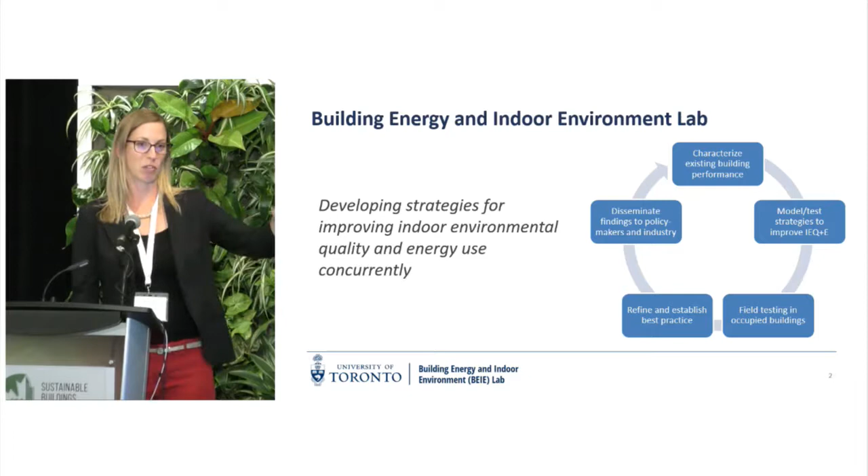And then sort of the latter part of our cycle is disseminating best practices. The lab's only been around for a couple of years, so we're still working on some of our initial projects, but that's sort of the end goal, to then influence design. So really the areas in which we work are the intersection between HVAC systems and the building envelope, and then of course how the occupants of the building influence both of those components.

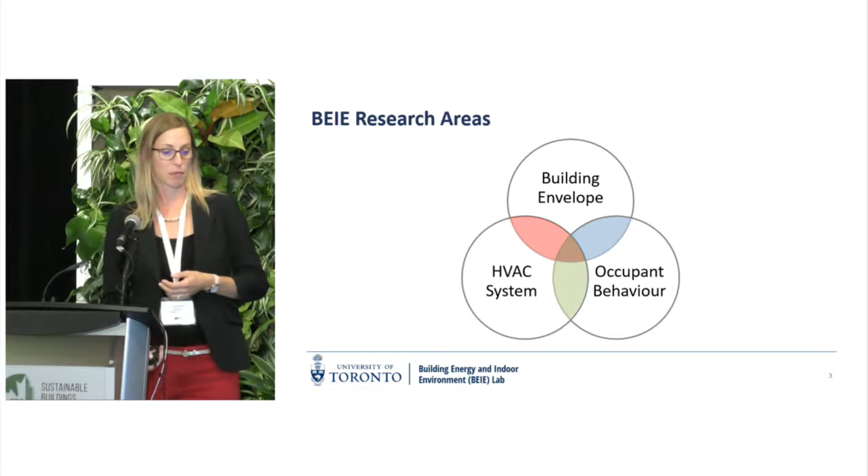So today, with this focus on overcladding in post-war apartment buildings, we're first going to have a bit of a crash course on how post-war apartment buildings operate. We'll look at what happens when you tighten the envelope, how that influences building performance, and then what happens when you build tight and then add that appropriate ventilation, so ventilating correctly.

And then I'm going to tell you a little bit about what I think is a pretty exciting study that we're working on at U of T. I'll show you some of our pre-retrofit results, but I'll have to come back next year maybe and show you some of our post-retrofit results. And then I'll talk about what our next steps are as well for this study.

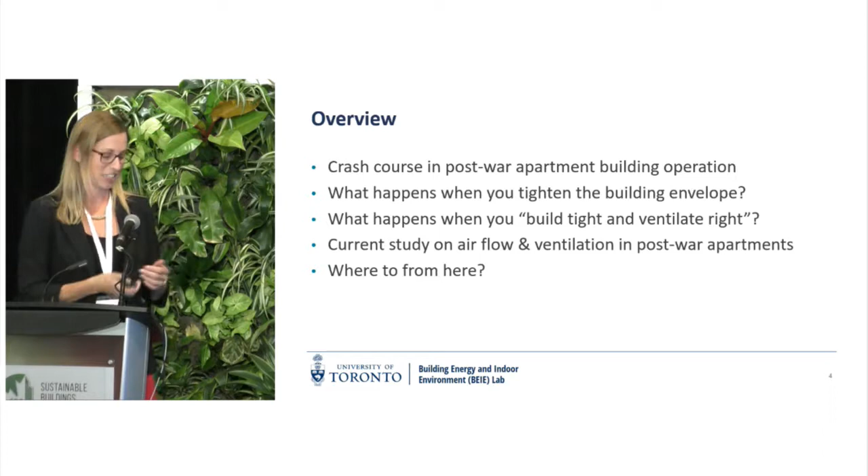So anybody who knows me knows I love these buildings. This is actually the building where I did my PhD. I spent a lot of time in post-war apartment buildings across the city. Just to get a sense, how many people in the room work in this sector and have a lot of experience poking around? Oh, only a handful. Okay, I expected a lot more. Okay, great. So maybe the crash course will be useful for more people than I anticipated.

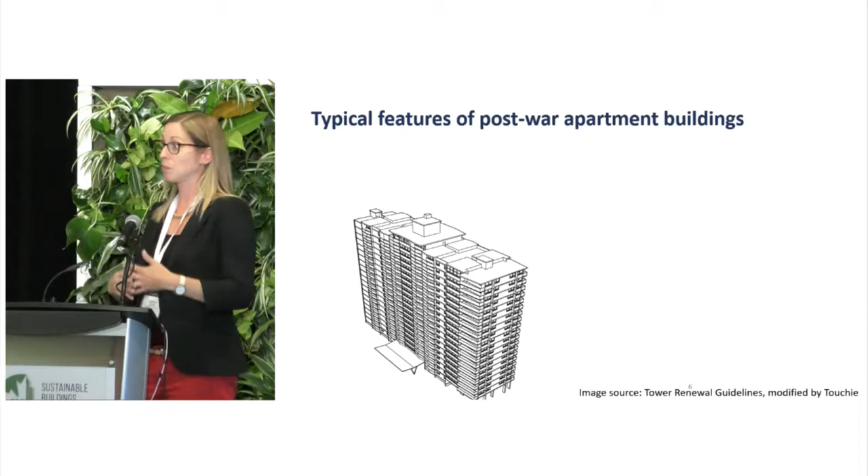So now I have to preface this. Obviously, every building is different, and we need to take a unique approach to really understand the challenges of each individual building and the occupants in which they live. But generally speaking, this typology has a lot of common challenges associated with it.

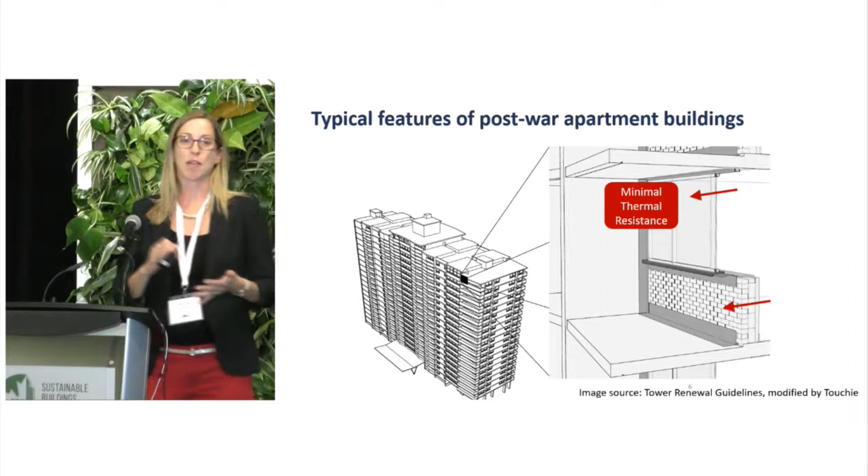First of all, these buildings were built in the 1960s and 70s, at a time when we weren't really spending a lot of time focusing on energy performance, so minimal levels of thermal insulation, if any. The original windows were usually typical single glazed sliders, very air leaky.

They are also different from the commercial buildings where I'm sure a lot of people in this room spend a lot of their time. We also have operable windows, so that adds a level of complexity here. We have exposed slab edges, which are very typical, so a lot of thermal bridging happening.

Also, one aspect of their operation that I don't think a lot of people are aware of is these buildings typically don't have any in-suite heating control. So there are often one or two temperature sensors used to control the entire building. So how do occupants regulate their temperature? They open and close their windows. That's also how they get access to fresh air.

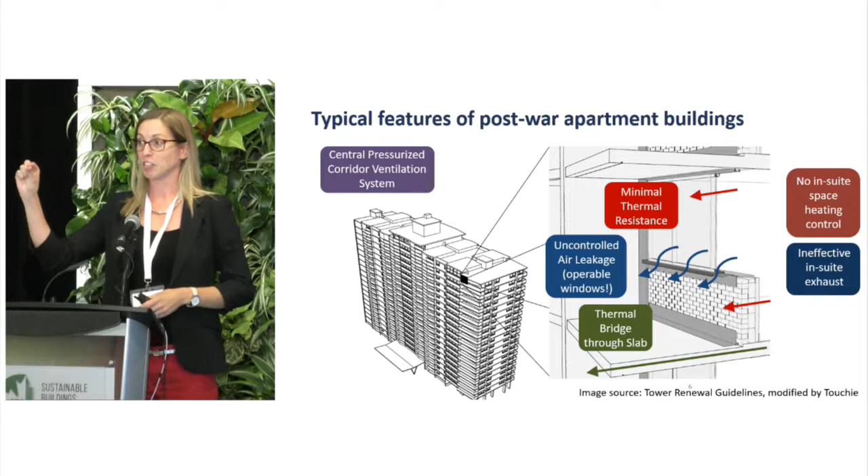So we really can't ignore occupants in a building like this, because they actually have an enormous influence on how the building itself operates. In terms of ventilation systems, these buildings typically operate with what's called a central pressurized corridor ventilation system. That involves a couple of makeup air units up on the roof that bring fresh air into the common corridor spaces, which in a perfect world are positively pressurized. Then we're relying on little tiny undercuts underneath the suite doors, if they haven't been blocked up, to allow that ventilation air to transfer into the suite.

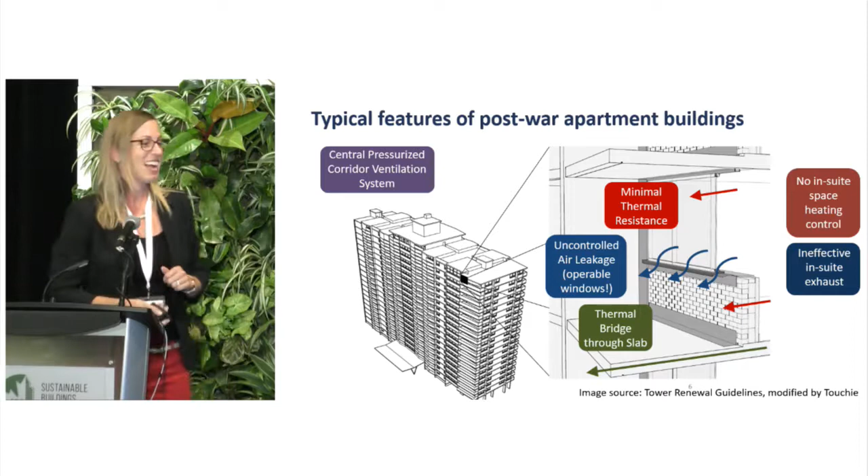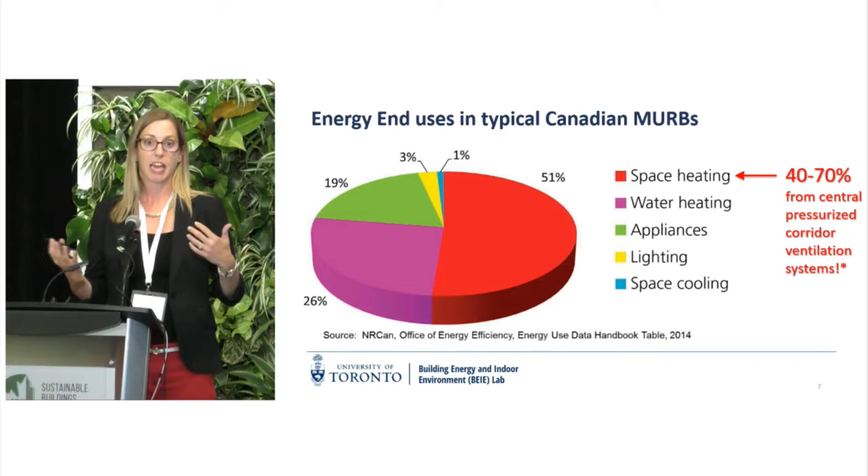So a lot of things have to go right to make these systems work well. But these buildings, in terms of energy performance, see a pretty similar profile to a lot of residential buildings in Canada - roughly half on space heating, a quarter on domestic hot water, and the remainder on all our other electrical loads. But a number of studies have shown that the operation of these central pressurized corridor systems, or the lack of their effective operation, actually contribute enormously to that space heating piece of the pie - between 40 and 70% roughly associated with their operation.

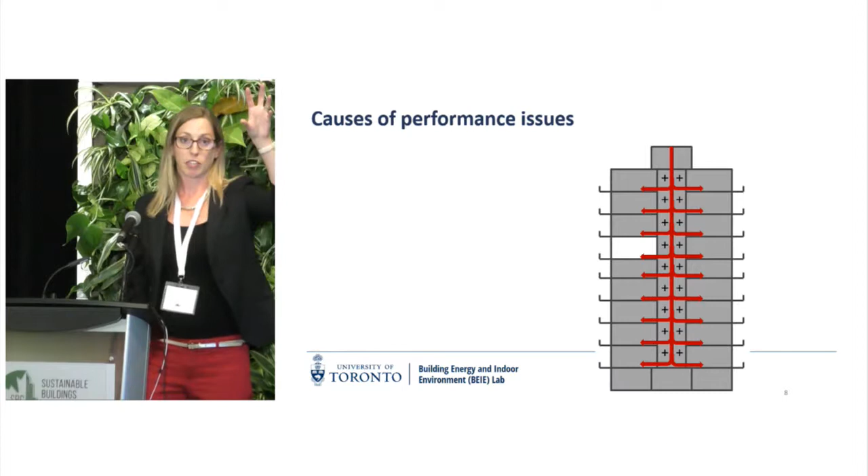So let's look a little bit more closely at how they work. As I mentioned, we have these makeup air units on the roof that in a perfect world are positively pressurizing, evenly pressurizing all the way down the building. But in reality, these buildings, or any building really, particularly in our climate, are operating under a lot of different dynamic conditions. We've got the effects of stack due to the difference between indoor and outdoor temperature, and we've got wind impacts as well.

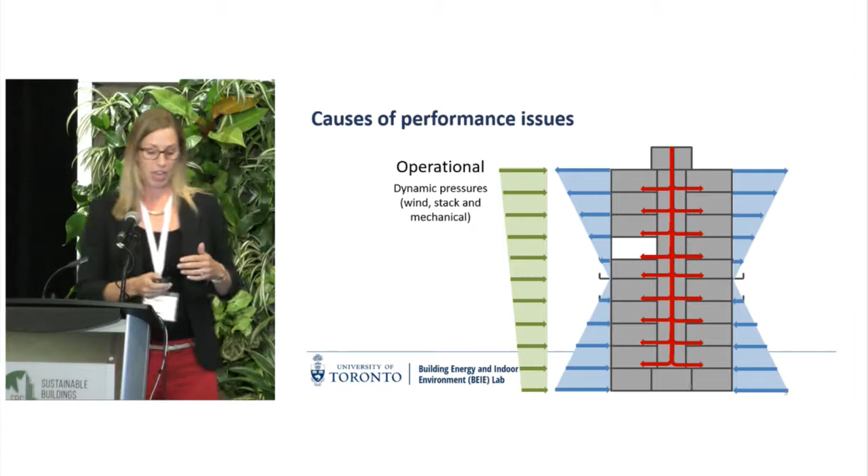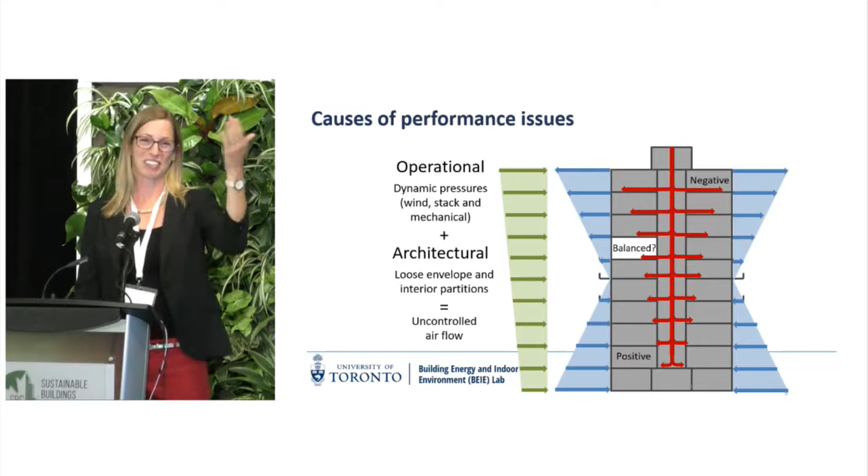And when you pair that with a relatively loose envelope - remember these people are opening and closing their windows to regulate temperature - and a lot of continuity or connections between the interior zones, so we've got a lot of interzonal air leakage, you end up having, it's really a bit random who is actually getting the amount of ventilation air that they require. So typically near the top of the building, we'll see higher ventilation rates than near the bottom.

So we know, and we've known for years, that these systems don't work, but to deal with a lot of these dynamic issues, these systems tend to be quite oversized. A study of about 10 MURBs - multi-unit residential buildings - built in the 1990s showed an average of 2.5 times the ventilation air being delivered from the makeup air unit than what was required by ASHRAE 62. So these buildings, these systems, are oversized.

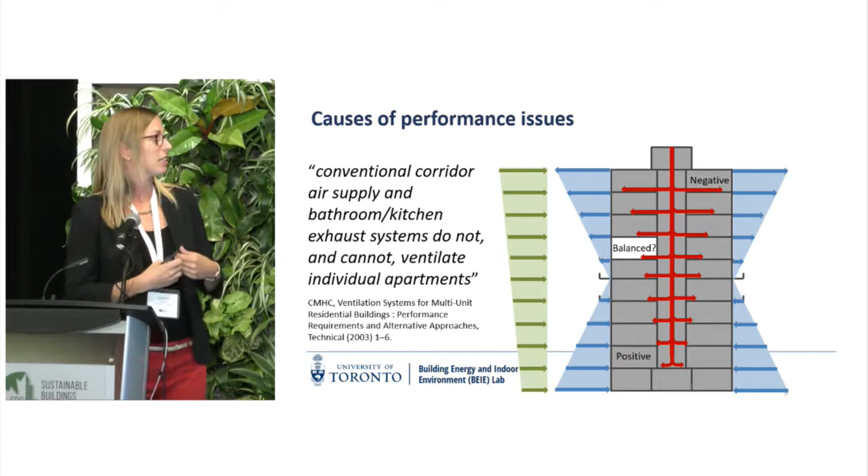So now that we have a sense of how these buildings operate and some of the challenges associated with operating them as they are currently designed, I want to take a look at a couple of case studies that have been done in other parts of the world - one Canadian and a couple in other parts of the world - and then I'll talk about the study that we're working on.

The first one, I'm sure many people in this room are familiar with, is the Belmont, probably the most monitored and tested building in Canada. It's a condominium, moderately sized, 13-story, 37 suites out in Vancouver that underwent an overcladding process, and RDH Building Consultants has done some extensive monitoring and testing of this building. That's why I'm using it for this example. We don't often have access to these type of data on this particular building type, but they used tracer gas

testing to look at how the air moves throughout the building, and extensive air leakage testing as well. So one would hypothesize that when you tighten up the building envelope, so you control a lot of that previously uncontrolled air leakage across the envelope, you would think that would have a significant impact on how air moves through the building.

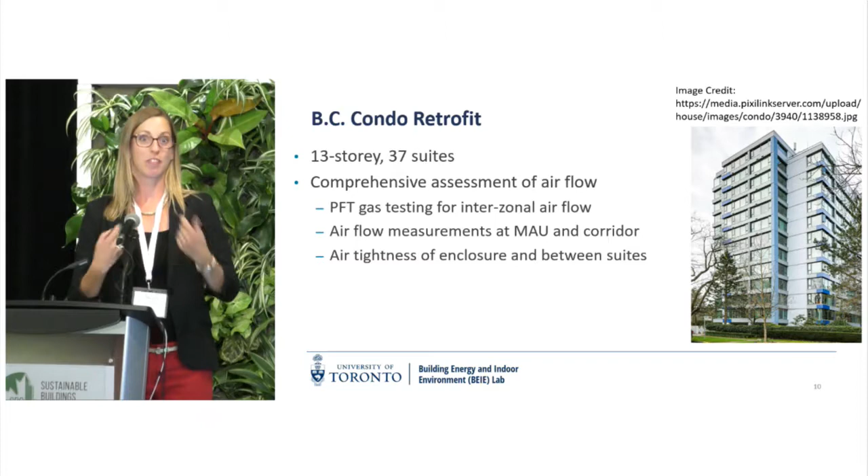The interesting thing was they found that post-retrofit, through their differential pressure monitoring, there really wasn't much change. They hypothesized that the reason why was the occupants—the window operation behavior did not change post-retrofit. So the impacts of that tightening of the envelope really didn't have the projected impact on how air was moving through the building. This is a plot taken actually from Lorne Ricketts.

This was his master's thesis, and this is one of the papers they published out of that. Basically the plot shows the building height from bottom to top on the y-axis, and then the flow rate that they measured. They used a balometer to measure the flow rate of the supply air grills in the common corridors on each floor, before the retrofit and then twice after the retrofit at different temperatures, in purple and blue. You can see that the pre and post retrofit airflows didn't really change that much.

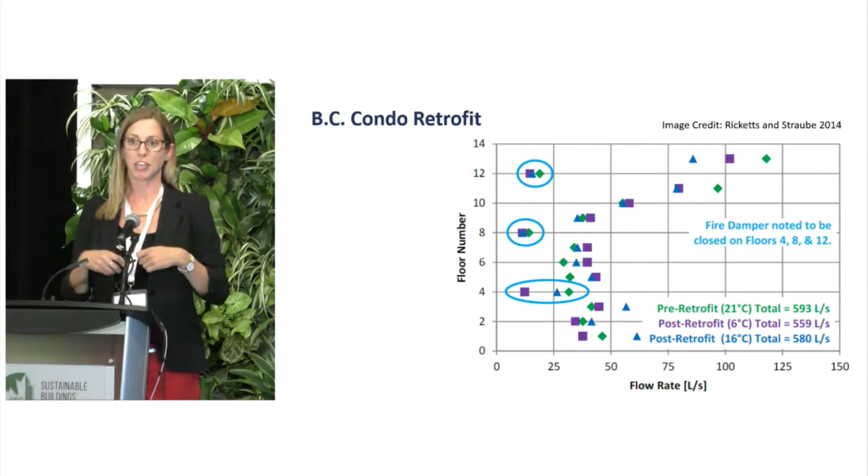So again, reiterating what we found before, because of the window operation of the occupants, we didn't really see too much of a change.

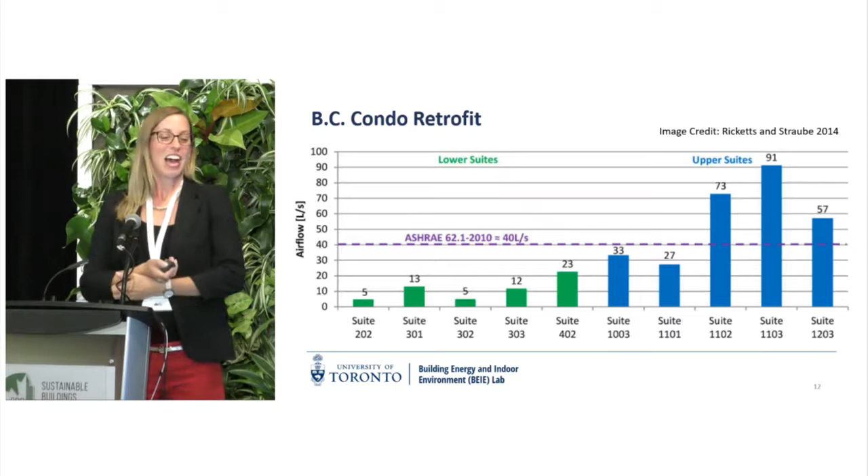So we know that overcladding and window replacement, or the decision to overclad and replace windows, is often driven by the desire to reduce heat transfer across the envelope. We're increasing the thermal resistance, we're tightening up the envelope, we're trying to prevent that uncontrolled air leakage, and also to improve building aesthetics. Particularly in private rental buildings, that's often a big driver as well.

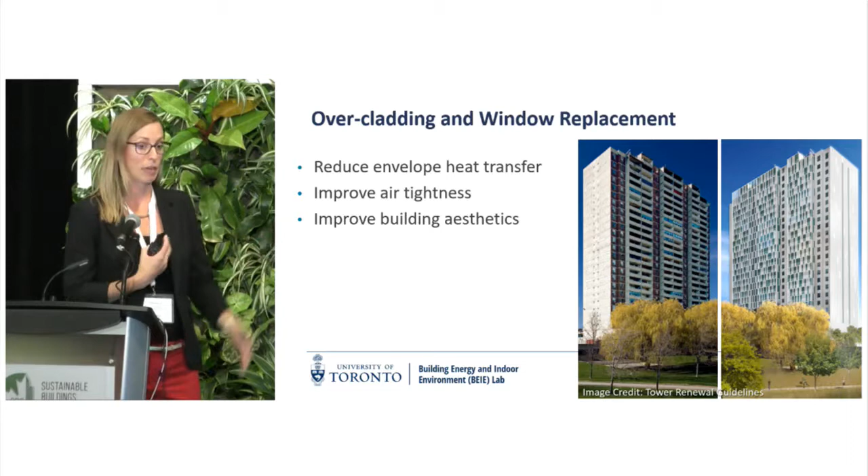But we need to be mindful that we're potentially increasing things like the relative humidity, the CO2 concentration, which in and of itself is not necessarily a huge concern depending on the concentration, but can be a proxy for things like odor transfer and smoke transfer and things like that.

So again, this is what they found out west, looking at some of the data, looking at the dew point temperatures for example. They were finding that the dew point temperatures in the corridor were much greater than what was coming from the makeup air unit, indicating some backflow. You're getting air flowing from the suites back into the corridor, leading to cross-contamination.

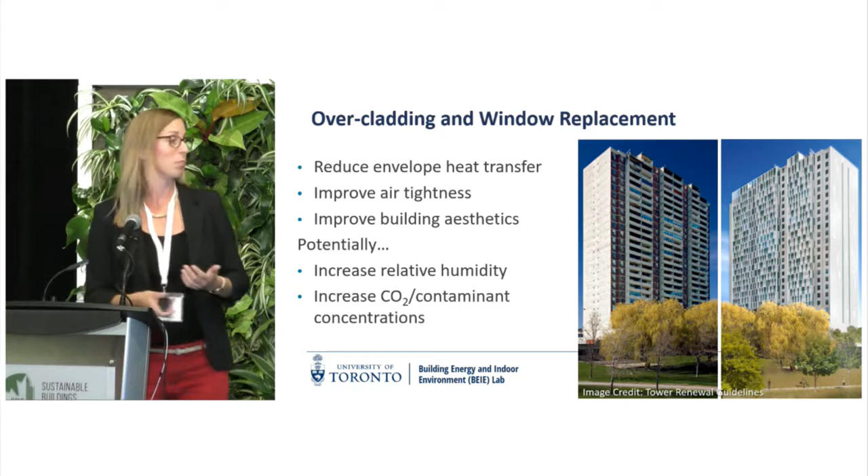Also, they noticed that the dew point temperatures in the suites were much, much higher than outdoors. So the existing supply and exhaust systems really weren't doing their job to get rid of the internal sources of moisture—something we need to be mindful of. But at the same time, we're all trying to save energy, we're all trying to reduce our space heating energy use and cooling.

So it's a good thing. But we can't forget about the occupants in these buildings. And I think so often we're focused on just getting to that number. We need to remember that occupants are going to do everything they can to optimize their thermal comfort and their access to fresh air. And so we need to allow them to do that.

So before we move on to the second part of the presentation, I just want to remind everybody, I'm sure everyone in this room is well aware that we design buildings for people, but sometimes it's worth remembering that in our effort to do energy retrofits, these retrofits can potentially have a positive impact on the quality of the indoor environment or no impact, but they can also have a negative impact. And so we need to keep that in mind right from the very beginning when we're starting these processes.

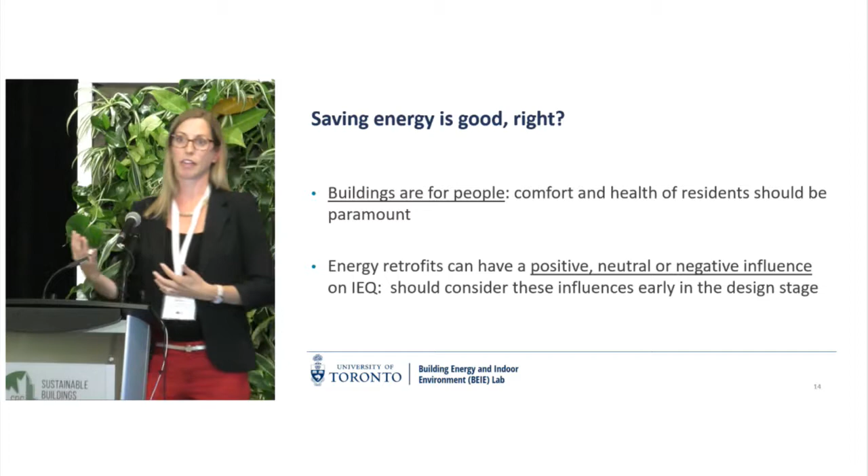So now I just want to share with you two international examples of overcladding retrofits that have been done more by looking at the building as a complete system, so looking at heating controls and also ventilation as well. One is in Sweden, 6 mid-rise buildings, built in the same era as a lot of our post-war buildings, in the 1970s. They had a fairly comprehensive retrofit plan. They actually only retrofitted 1 at the time that this study was published, but did a fairly comprehensive analysis that included in-suite monitoring of temperatures and relative humidities. They also did comprehensive resident surveys, and some energy submetering as well.

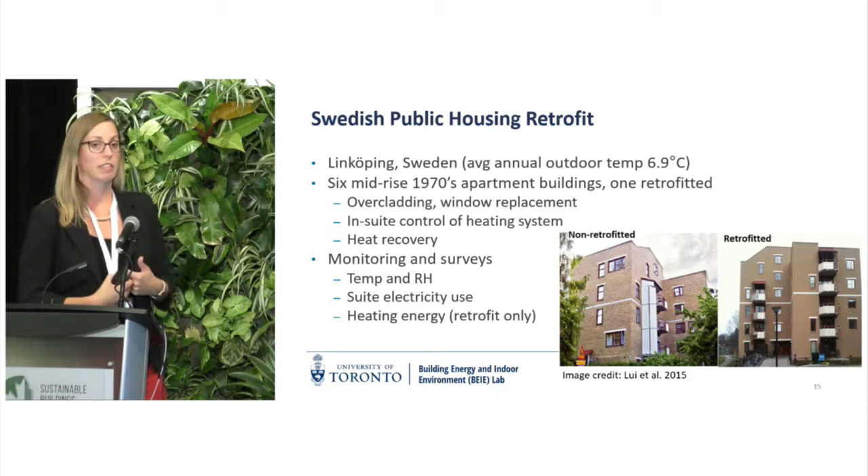So what they found were a number of improvements to the quality of the indoor environment. Post-retrofit, with this balanced supply of ventilation air and the overcladding completed, there was a lot less odor transfer between suites, and smoke transfer between suites was reduced. In terms of interior temperatures, much more comfortable in the wintertime, less draft sensation because of that air tightening, and significantly less noise as well, which makes sense. If you improve the windows and reduce that uncontrolled air leakage, you're going to have a lot less noise from outside. And also reduced instance of health issues, cough and dry throat, headaches, things like that.

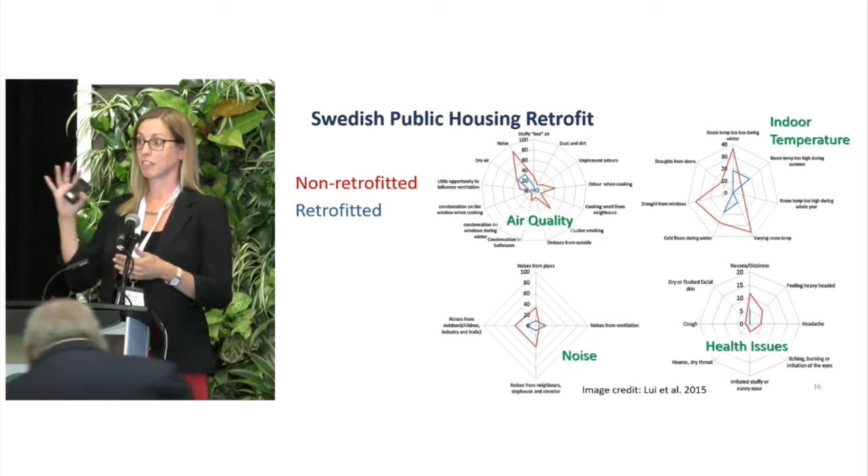But one of the things they did notice was that in the summertime they started to see a bit of overheating, so there's still a little bit of a control issue that we have to deal with there. But on the whole, all of the residents were more satisfied with the quality of their indoor environment, and they were also able to achieve almost a 40% reduction in space heating energy use. So it's possible to do both of those things. It just requires giving residents the tools to tune their indoor environment the way they want to without having to resort to things like opening and closing windows.

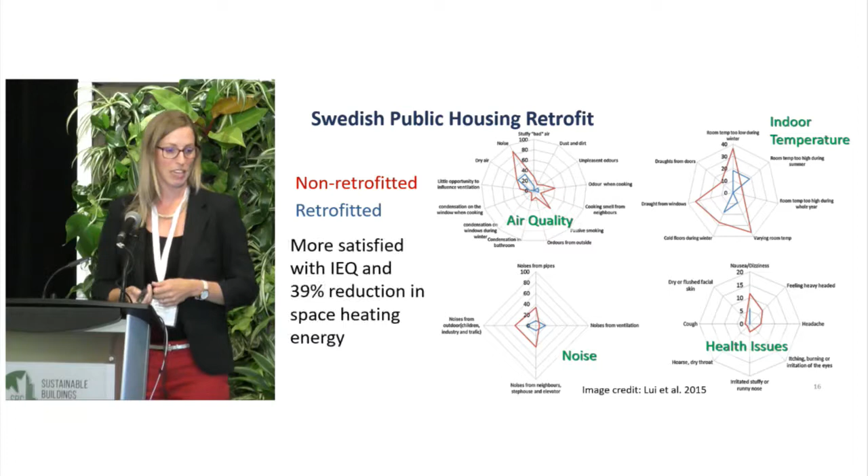Another retrofit I wanted to talk about briefly was Wilmcote House, which is in the UK, a little more similar in size to the buildings that we deal with here in Toronto, with larger 3-bedroom suites. One of the big issues with this public housing building that's different from the way we do things here: normally residents here don't actually pay for their energy use, but there the energy use was submetered. And so fuel poverty was widespread. About half of the residents prior to the retrofit would go without heating in order to save money. They would turn their heat off in the middle of the winter. And you can imagine the mental and physical health effects that had on the population.

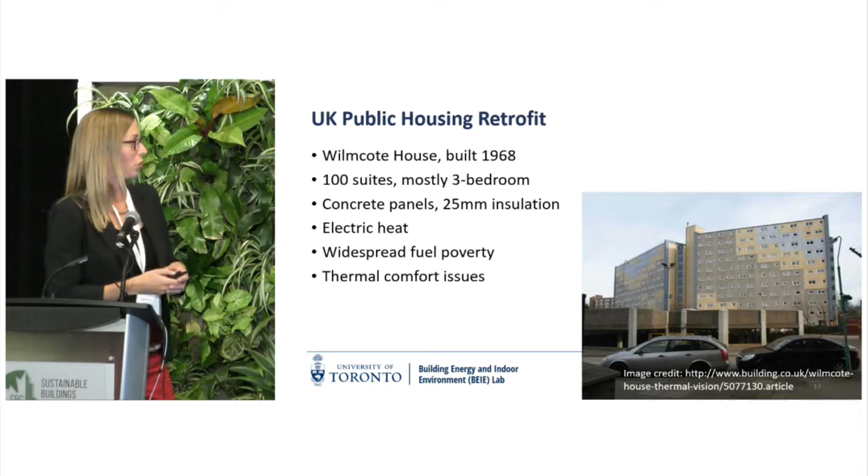As part of the retrofit process, one of the big pieces was resident consultation, first of all getting a sense for what the issues were at the outset. So they had surveys and semi-structured interviews of the residents before, during the construction process, and after the retrofit. I pulled out a couple of my favorite quotes. Most of the building was rubbish, the heaters and the windows, a lot of mold growth on the inside of the building, and again this fuel poverty issue, incredibly expensive fuel bills that the residents had to deal with. So as part of the retrofit process, an overcladding was done, and triple glazed windows were installed.

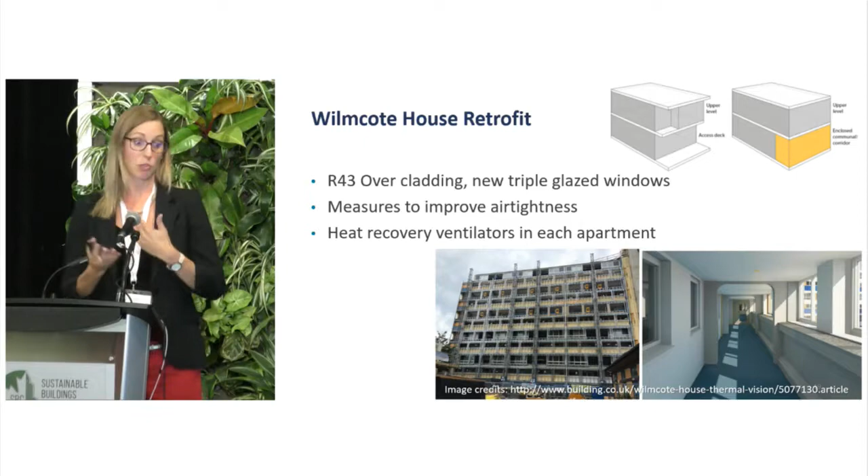They actually enclosed some exterior corridor spaces, and they added this balanced supply of ventilation air into each suite. So post-retrofit, again, they went back and interviewed the residents, and I think the average energy savings per suite annually was something like 700 pounds. So a really dramatic decrease in fuel costs.

I think only one respondent post-retrofit said that they still had to moderate their heating energy use in order to save money, but basically everyone was able to now afford to heat their suites to a comfortable level, and it dealt with a lot of the indoor air quality issues with that balanced supply of ventilation. So some great international examples.

But this is actually a retrofit I was talking about with some people at lunch. I'm trying to actually find some examples of this system-level retrofit that involves suite-based ventilation here in Toronto. So if you have any projects, come and talk to me at the break.

And no suite-based ventilation strategy. The ventilation systems are being replaced, but replacing like with like, so still sticking with that pressurized corridor system. So we really wanted to take a comprehensive approach to this study using a lot of the protocols that have been established in some of these international studies. So rather than just monitoring some of the indoor environmental quality parameters, we also wanted to talk to the residents and get their perceptions of those spaces both before and after.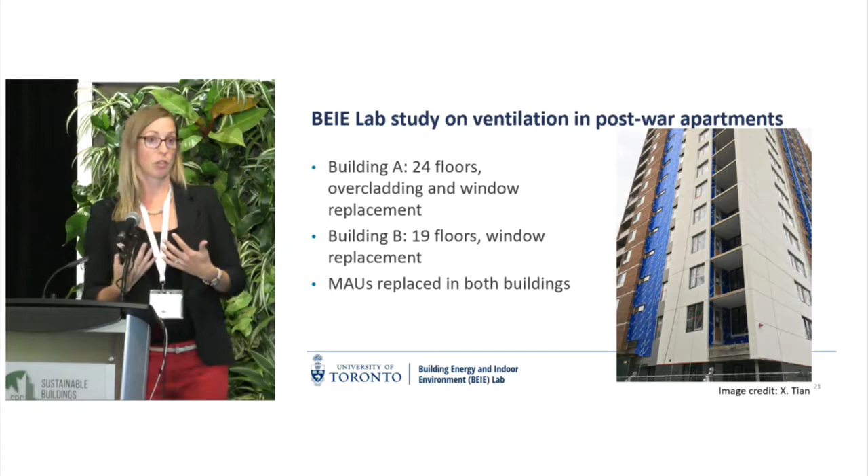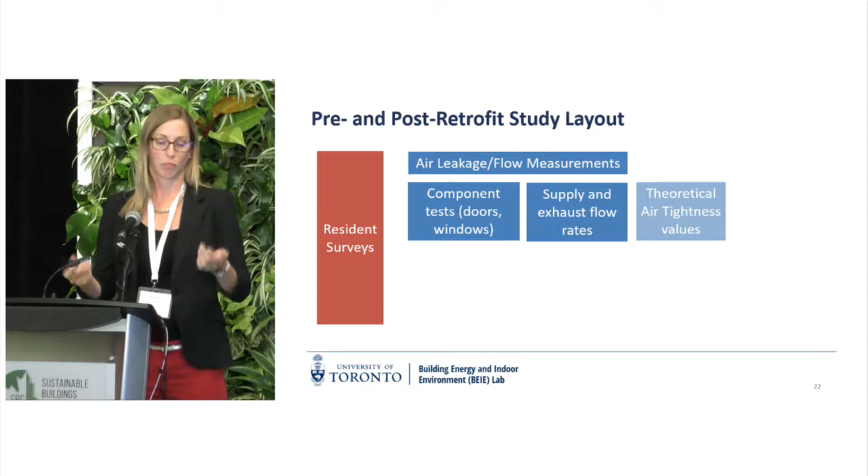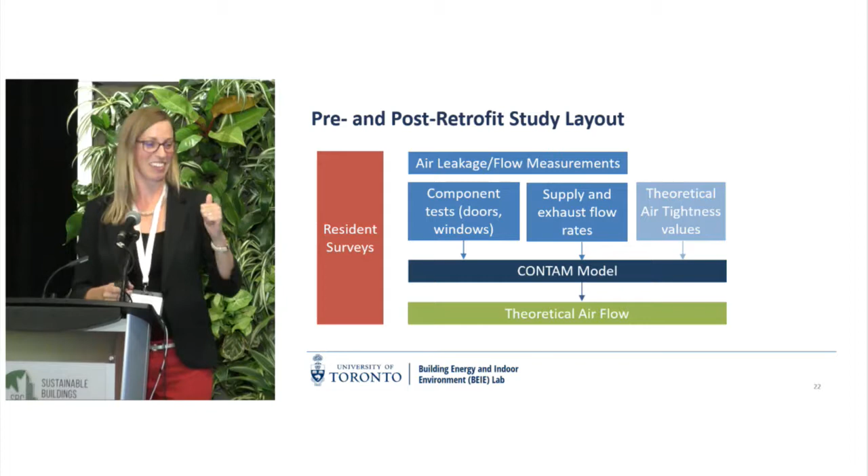And then we supplemented that with some theoretical values from the literature to develop a series of CONTAM models where we're basically trying to calibrate that model, although that's been a little challenging, to some of the field data that we collected. We also undertook some tracer gas testing.

So we seeded a number of the suites with different gases and used capillary adsorption tubes to collect those gases, to basically paint a picture of how air moves between the suites and how much air exchange each of those suites is seeing with the outdoors. And then we also seeded the makeup air units to see how that ventilation air is distributed throughout the building. But getting these two things to agree is rather challenging.

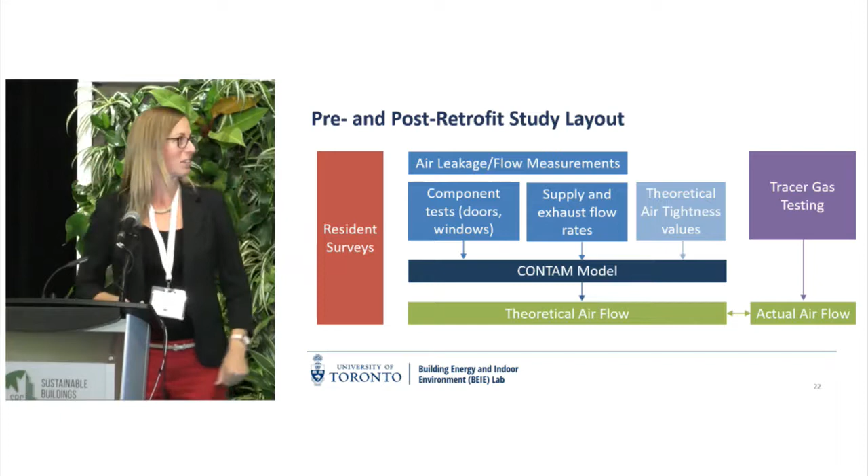But the idea was to create this model with which we could then try to model the impact of the overcladding and the window replacements, and then post-retrofit, we want to see how close we were able to get with that modeling. So that's really the purpose of this multi-pronged approach, to see if we can come up with a more reliable way to model this.

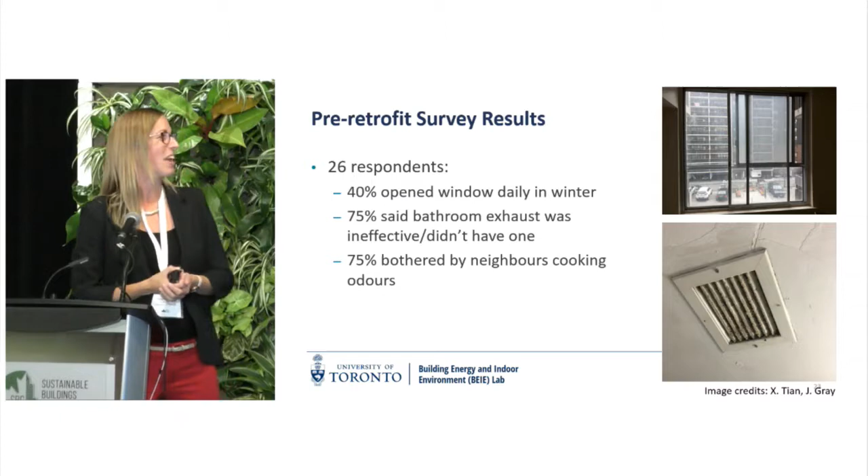So some of the pre-retrofit survey results are similar to what I had experienced anecdotally in other buildings and from other studies as well. 40% of the respondents were opening their windows daily. Almost everyone else was opening them once or twice a week. What was interesting was almost three quarters of the residents either said their exhaust system was not working or they did not have one. Now they all have one, so I'm interpreting that as it is virtually useless in their mind. And a lot of residents were bothered by odors and smoke transfer from other suites.

And these findings agree with results from a much larger study that we had done across 7 buildings. So in this plot, the icons are cooking, neighbors cooking, smoking, and outdoors. So we were basically asking the residents how often they were bothered by this.

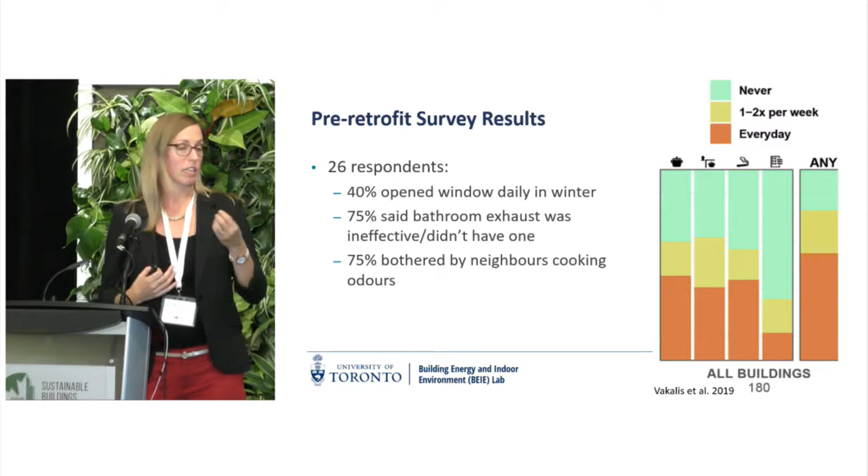So the red bar is indicating daily. I said a sample size of 70; this was actually a sample size of 180 suites across 7 buildings. Over half of the residents were bothered daily by at least one of these things. So this is a significant issue.

So as I mentioned, the other part of the study that we did was using this tracer gas testing. Because of the window operation, it was difficult to get any precise results from this, but we have some idea of trends. The results of the tracer gas testing suggested a direct connection between a lot of suites. So rather than air moving out into the corridor and then into another suite, we were actually seeing transfer directly between suites, which is understandable when you think about some of the mechanical penetrations that could be occurring through the slab.

Results also suggested some of this backflow, so actually negatively pressurized corridor, so the air is moving from the suites back into the common corridor, which again agrees with our survey results looking at the detection of odors and smoke from other suites, and agrees with the studies done out west as well. And extraordinarily high infiltration rates. And again, expected because the occupants are opening their windows. So it's nice to see that our field measurement is agreeing with the survey. Sometimes that does not happen.

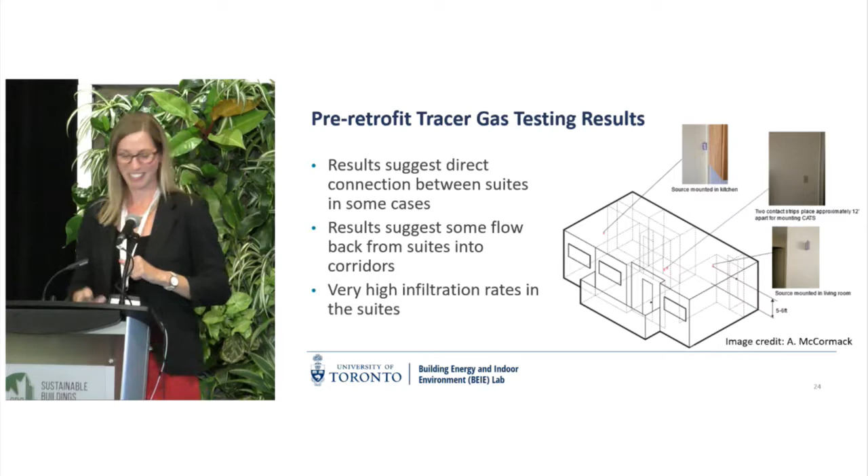And then the step that we've just finished and needs a bit of a refinement is to actually create a pre-retrofit model of this building. So just as a first cut, obviously this is a very dynamic system, so we were testing various wind and corridor pressures. But basically in all instances, as soon as we added that overcladding, the level of interzonal air exchange actually increased. So something that we need to be mindful of.

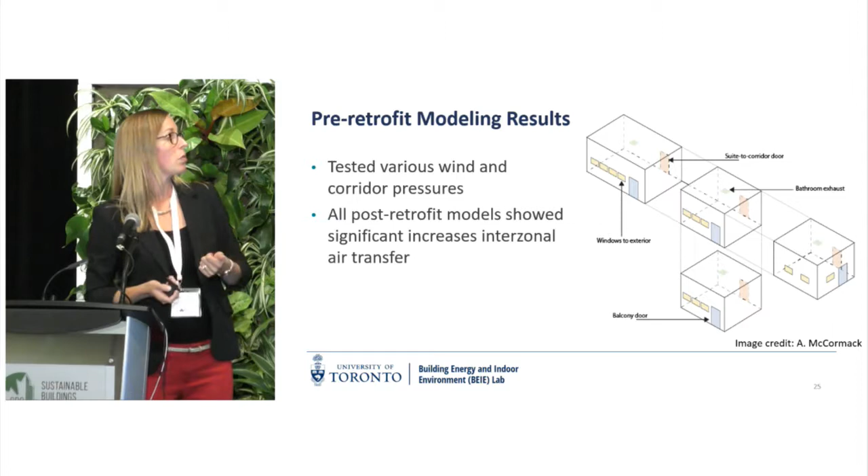And again, another sort of plug for some sort of balanced supply of ventilation air at the suite level. And I'll come back to it, but interzonal air sealing is something that we need to look at and something I'd like to explore. So the next part of the study that we're just embarking on right now is actually trying to model some different ventilation strategies to understand the energy impact of these strategies, but also how effectively we can move air through these buildings given all of the dynamic forces that I had mentioned before.

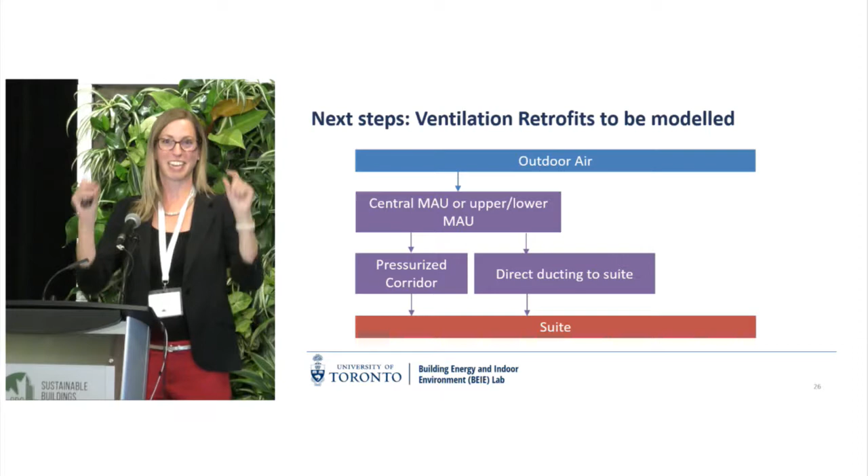So there's a bunch of different ways to get outdoor air to the suite. So we'll model this base case, as I mentioned, with that central makeup air unit and the pressurized corridor. Look at decentralized makeup air units, so can you split them across the building height to reduce the impacts of stack? One of the buildings that we're working with right now wants to investigate direct ducting of that supply air at the corridor level into the suite. So we'll model that out. If the central system itself doesn't work, then ducting it directly to the suite, I'm not sure how well that's going to work, but we're going to try it out.

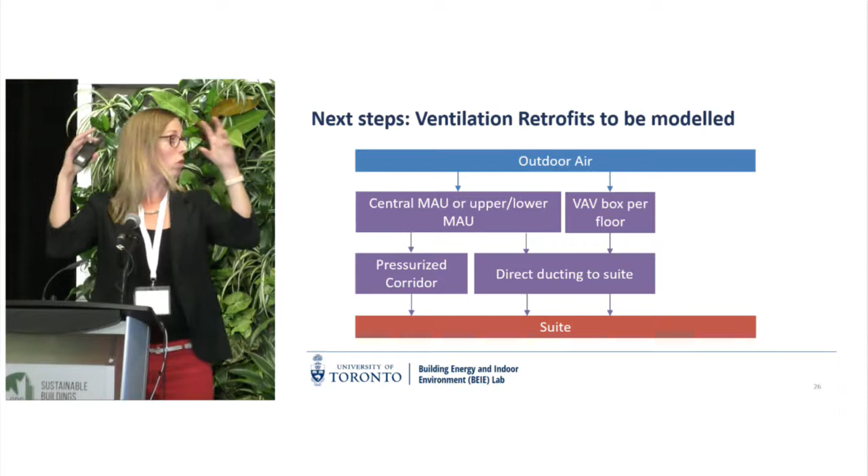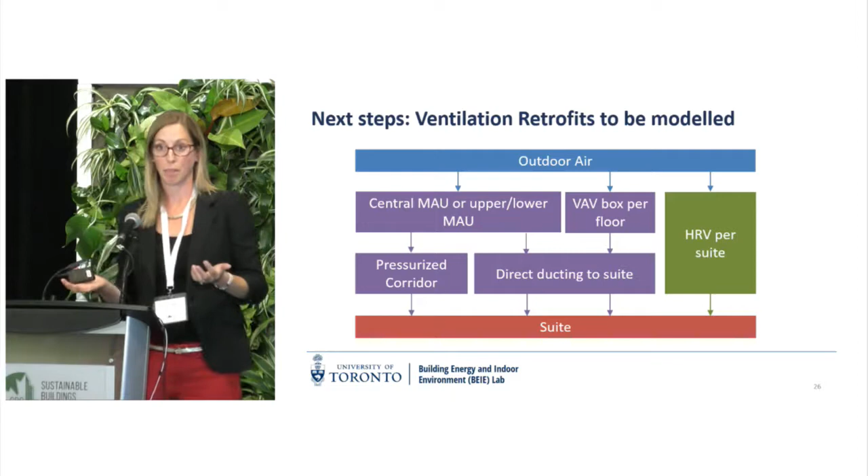Using a VAV box at the floor level to, again, try to manage those airflows, dealing with wind and stack. And then looking at sort of the other end of the spectrum, completely decentralized, looking at 1 HRV per suite. So that's what we're just getting started on, but hopefully I'll have some results for you in the next couple months on that.

So on the whole, I just want to wrap this all up. I know I've thrown a lot of information at you about these different case studies, but I just want to wrap this up with a couple of lessons, thoughts, things to think about, things that we can discuss at the coffee break. So I want to be clear that I'm not saying that we do not need to improve the performance of our building envelope. We absolutely need to do that and take those passive measures to reduce heat transfer and reduce that uncontrolled air leakage. Another element that I think we need to consider, which I mentioned briefly, is that uncontrolled airflow between suites, so that interzonal air sealing, or the idea of compartmentalization.

But we need to actually add some sort of active or more effective mechanical ventilation, so some sort of balanced supply of fresh air at the suite level. And then obviously improving system efficiency. But the other piece of the puzzle, which I didn't have time to talk a lot about today, but I think warrants perhaps a whole other presentation, is control strategies.

Controlling things with such a large building, with such diverse demands from the residents, at a central level does not make sense. We need to be able to provide residents in their suites with control of both temperature and access to fresh air. So that's something that needs a little bit more attention.

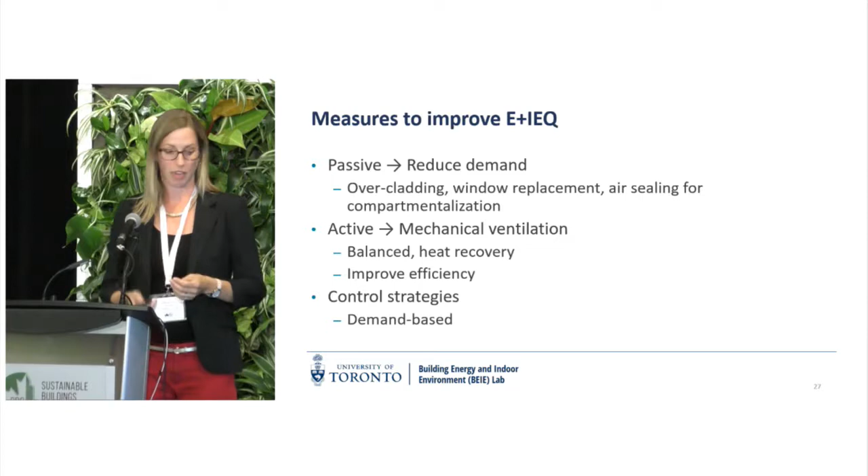This all sounds great, but there are a lot of reasons why we don't actually do this. First of all, we need a goal to work towards. We often work towards an energy target, but I think we need to really think about targets for indoor environmental quality as well, and have measurable goals—this is what we're aiming for, and this is the level of acceptance with the residents that we're aiming for. You can't manage what you can't measure, but you can't get to a goal unless you set it. So we should set the goal.

There's also an issue with multifamily buildings where we have a split incentive. Often the people paying for the capital upgrades are not those paying the energy bill. There are some innovative ways of getting around that, so we just need to be a little bit more open-minded there, and I'm happy to talk to people about that further.

A lot of these buildings are social housing buildings, and there are obvious capacity constraints that we need to deal with there. That's definitely a tough one, but we'll see what happens after the election—there is potentially funding available, and we need to make sure all the appropriate parties are aware of what's out there, so we can maximize what we can do.

The other thing I wanted to point out was more comprehensive modeling. We don't necessarily want to stop at the energy model—we want to look at some of this more detailed airflow analysis, and I know there are a lot of experts in the room who can do this. We just need to make sure we're understanding the impact of the systems we're putting in.